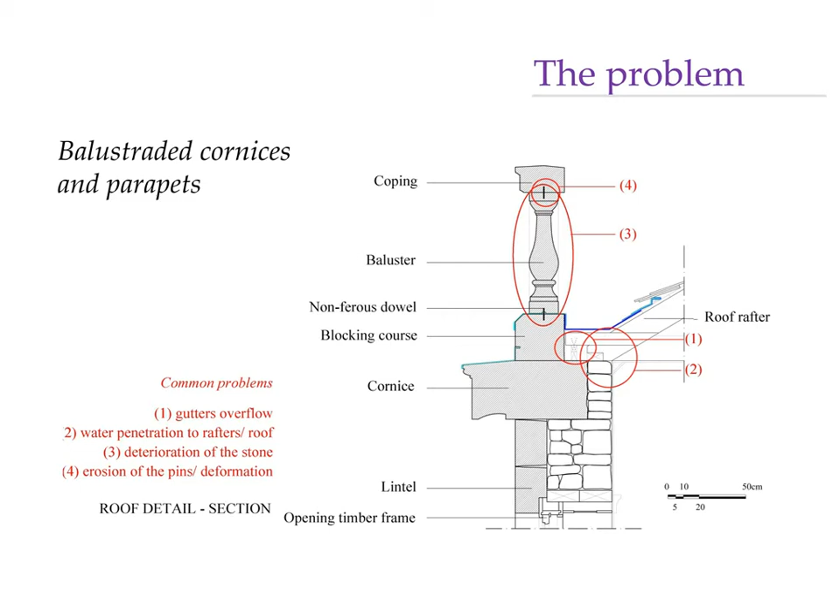The problems we've identified after discussions with the project partners, the most common of them, you can see on the drawing. A classic, very typical problem is the gutters overflow, the water penetration to rafters and roof in general, the deterioration of the stone, and the erosion of the pins, and finally deformation.

After many discussions with different people, I've come to realize that there are many different approaches, and this doesn't necessarily mean that one is right, one is wrong, one is appropriate, and another one is not. It might be just a different philosophy towards conservation in general. Of course, it depends on the degree of erosion that we have each time. It depends on the cost and how much funding is available, on the time schedule that we have for a project, on the available material, and of course on what different architects think about original material reuse.

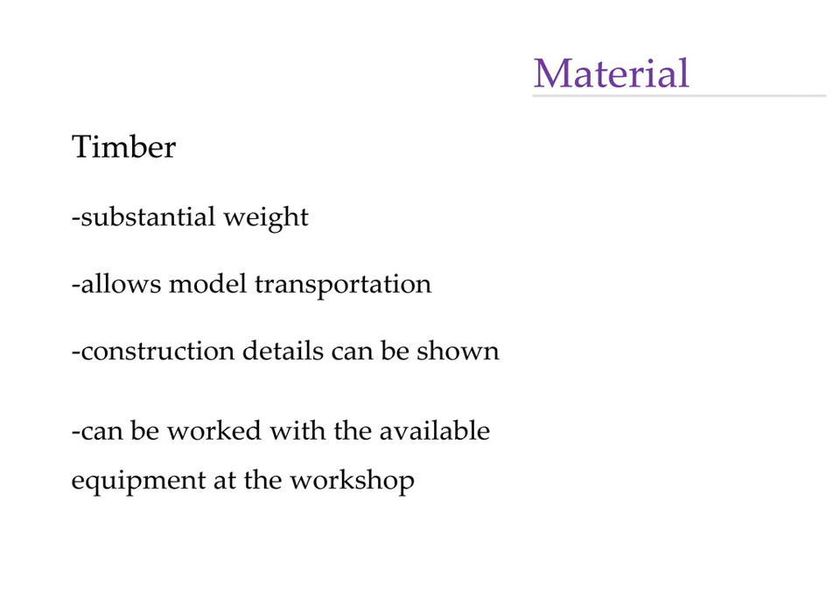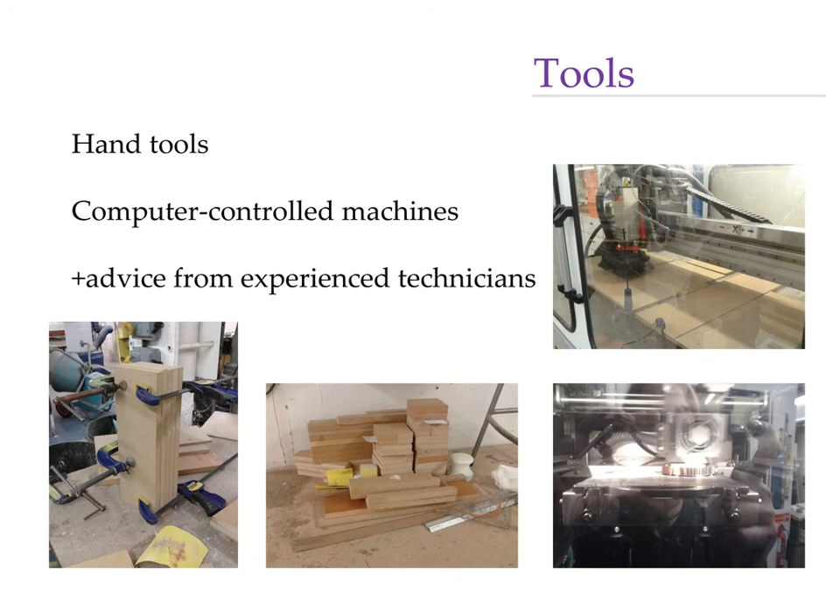The materials are also another issue. We decided timber was to be used because it has a substantial weight. It allows quite easy transportation, and the details can be shown very clearly. It can also be easily worked with the equipment that we've got at the workshop downstairs. We have used a variety of hand tools and computer-controlled machines to achieve the desired results. Plus, it was very important to have advice from experienced technicians so that we can save time and avoid mistakes. And we had the chance to realize the advantages and restrictions in the use of each tool, machine, and material, which was very important during the fabrication of the model.

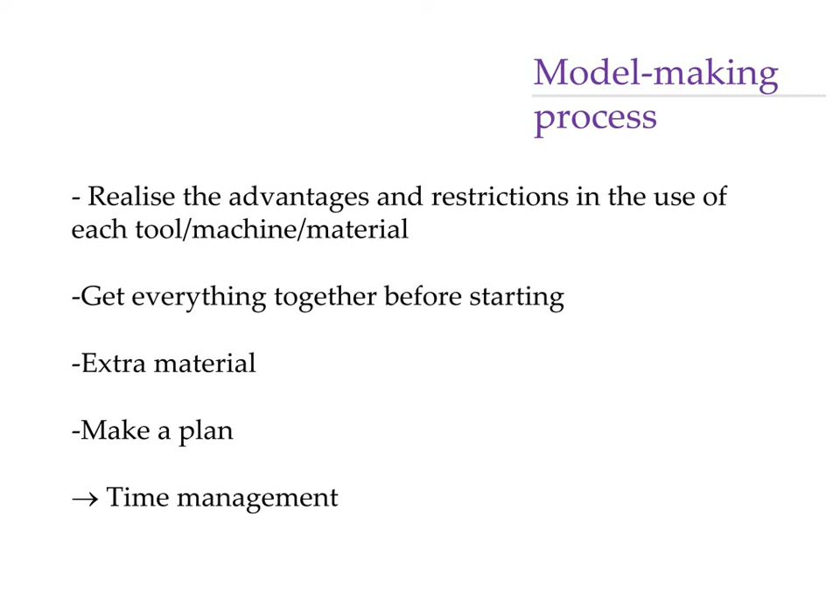It was very important to get everything together before starting, to have some extra material in case mistakes were made, make a plan, and generally manage our time wisely. Of course, there's always the question, maybe I'm showing too much information here and maybe we lose the point. So we had to decide to show some things and to avoid showing other things so that it doesn't get very complicated. And sometimes we had to revise our original ideas.